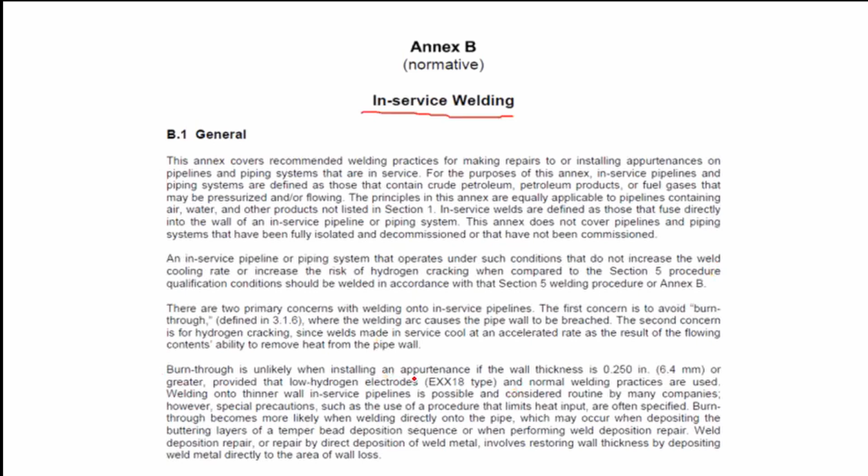As you can see here in this 4th paragraph, burn-through is unlikely when installing an appurtenance if the wall thickness of the pipe is 0.25 inch or greater. Based on Annex B, burn-through is unlikely to happen if the wall thickness of the pipe is greater than 0.25 inch and/or provided that the electrode used is a low hydrogen electrode type, the electrode types ending in 8, 5, and 6 digits.

So from the choices, you can rule out letter A, since stating the material only without information on the heat input and the pipe thickness cannot be a definitive answer. Letter C, pipes pressurized to at least 15 psi does not affect burn-through. Whatever the operating pressure of the pipe, it does not affect the welding discontinuity, that is burn-through.

Letter D, preheating prior to welding. Preheating actually softens the pipe material or reduces its hardness, so in some ways it can promote burn-through if preheating is not done properly. Letter E, welded by a qualified welder. Welding these pipes must be done by a qualified welder by passing the appropriate welder qualification tests, but it doesn't mean that burn-throughs will not happen in this situation.

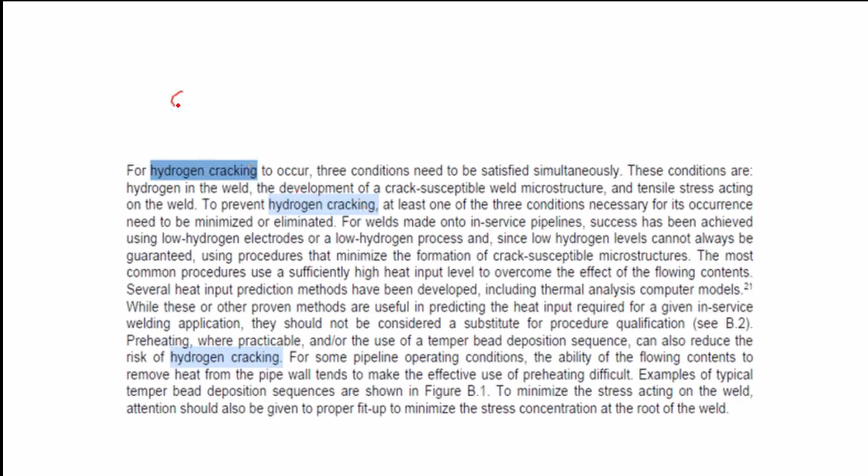So this question also refers to in-service welding. The answer can be found in Annex B, point 1, General, under the general clauses of API 1104 Annex B. In this paragraph, hydrogen cracking can occur when there is hydrogen in the weld, development of a crack-susceptible microstructure, and tensile stress acting on the weld.

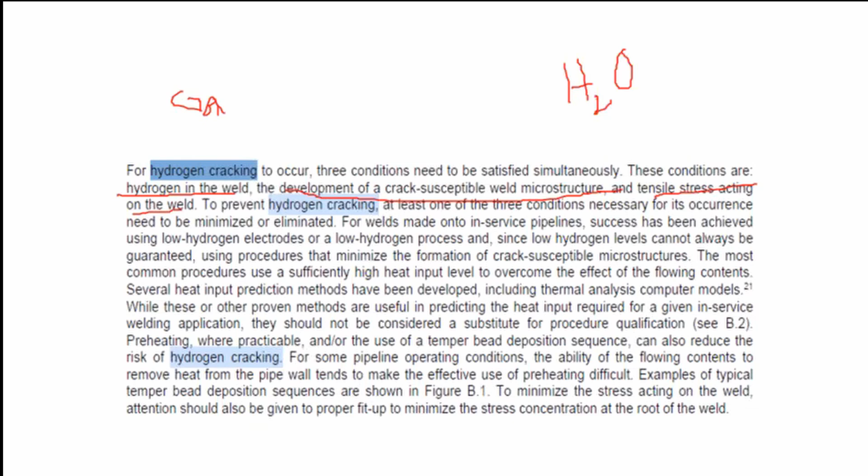The presence of hydrogen in the weld is possible because of moisture, since water is composed of 2 hydrogen atoms and 1 oxygen atom. Crack-susceptible microstructure refers to materials with coarse grain structure, more common in high hardness and non-heat treated materials, because they are more susceptible to hydrogen cracking, or cracking in general, if heat treatment methods are not properly implemented, and there is tensile stress acting on the weld.

So the last 2 points, crack susceptible microstructure and tensile stress, can be resolved with the use of heat treatment methods, because residual stresses can be relieved by PWHT or heat treatment. So that leaves us with the answer here.

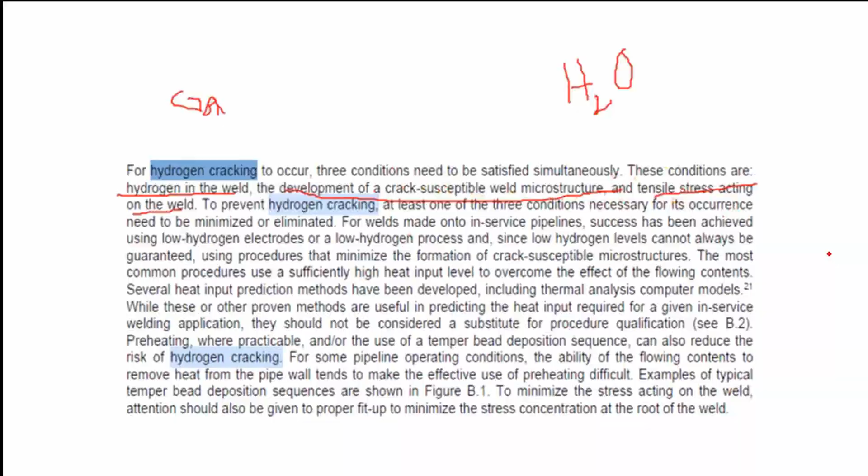Letter E, only A and C above. So a crack susceptible microstructure and tensile stress acting on the weld. The weld discontinuity may or may not induce hydrogen cracking. This is a very general statement; it will depend upon the discontinuity. The answer here is letter E.

For welder qualifications of an in-service longitudinal seam weld on pipe with a 12-inch or 300 mm outside diameter and a wall thickness of 1 inch or 25 mm, which test specimens are required? Letter A, 2 tensile, 2 nick break, 2 root bends, and 2 face bends. Letter B, 2 tensile, 2 nick break, and 4 side bends. Letter C, 4 nick break, 4 face bends, and 4 macros. Letter D, 1 tensile, 1 nick break, and 2 side bends. Letter E, 1 tensile, 1 nick break, 1 face bend, and 1 root bend.

There are separate guidelines for qualifying welders for in-service welding, referred to in section B.3 of Annex B. Testing of welded joints: similar to other welding qualifications, there are requirements for the number of test specimens for in-service welding given in table B.5. Looking at this table, you can see the total number of test specimens depending on the sleeve wall thickness of the pipe.

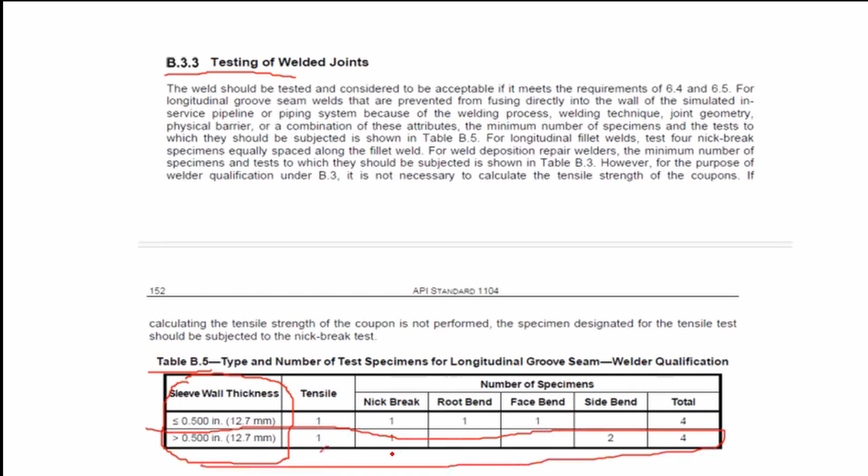So looking at this table, the wall thickness is 1 inch, so this row should be the answer: 1 tensile, 1 nick break, and 2 side bends, a total of 4 tests. Looking at the table and based on the choices, the answer here is letter D, 1 tensile, 1 nick break, and 2 side bends.

For in-service welds, the carbon equivalent of the material to which the procedure applies should be identified. Which of the following elements is not used to determine the carbon equivalency? Carbon is important for in-service welds because it determines the hardness of the material. Different materials have different carbon equivalents depending on their chemical composition, which you can find in the mill certificates. Letter A, copper. Letter B, nickel. Letter C, silicon. Letter D, vanadium. Letter E, chromium. This can be answered if you are familiar with the carbon equivalent formula, which you must know if you are taking the CWI exam.

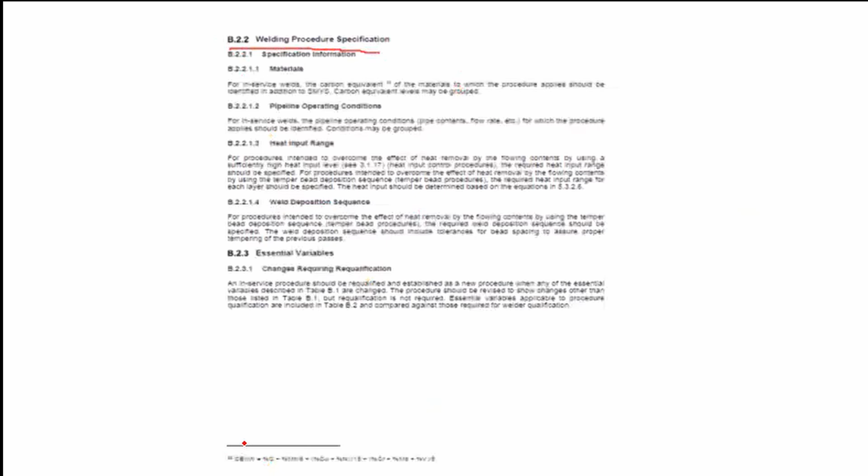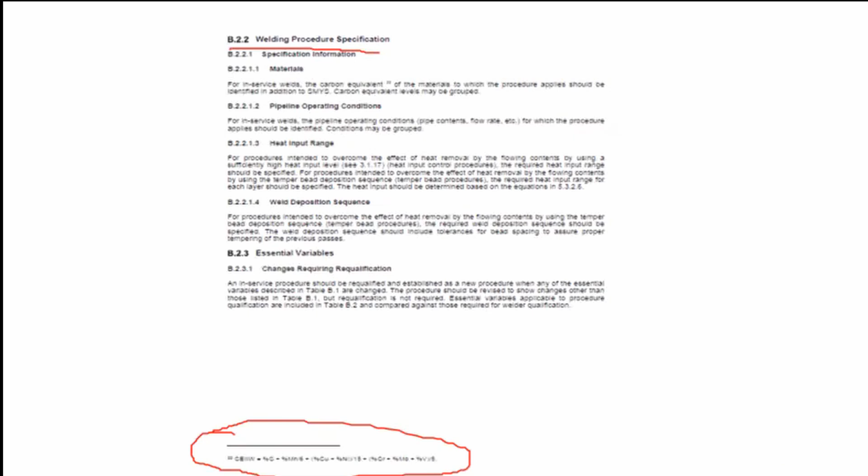If you want to make sure, you can refer to the footnote of B.2.2 Welding Procedure Specification under the annex on in-service welding. It's a bit small here, but this is the formula for the carbon equivalent, where the elements considered are indicated. Based on this formula, silicon is not included, so the answer is letter C, silicon. Silicon has a different function, I think for deoxidizing the steel, and does not contribute to the carbon equivalent or, in general, to the hardness of the material.

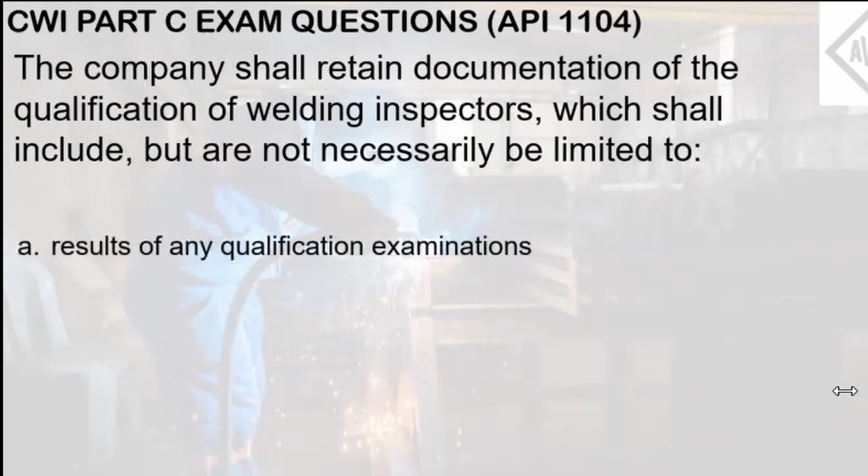The company shall retain documentation of the qualification of welding inspectors, which shall include, but not necessarily be limited to: A, results of any qualification examination; B, education and experience; C, training; D, all of the above; E, none of the above.

The qualification of inspection personnel can be found in 8.3 of API 1104. Documentation is necessary not only for safekeeping and legal purposes, but also to track if qualified welders need to be retested. I think there is an expiration, so to speak, of the qualification if they are not using a specific welding process, for example GTAW or FCAW, for a couple of months or years. They need to be retested, for example if they have produced unsatisfactory welds, or to have proper tracking of these welders.

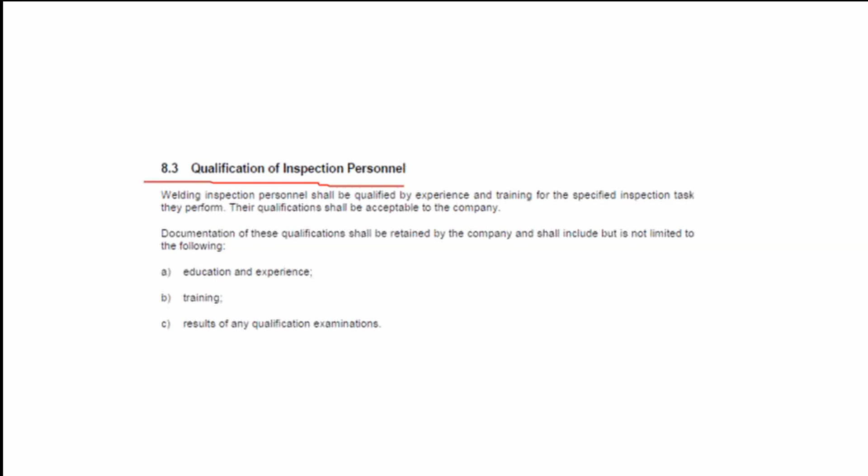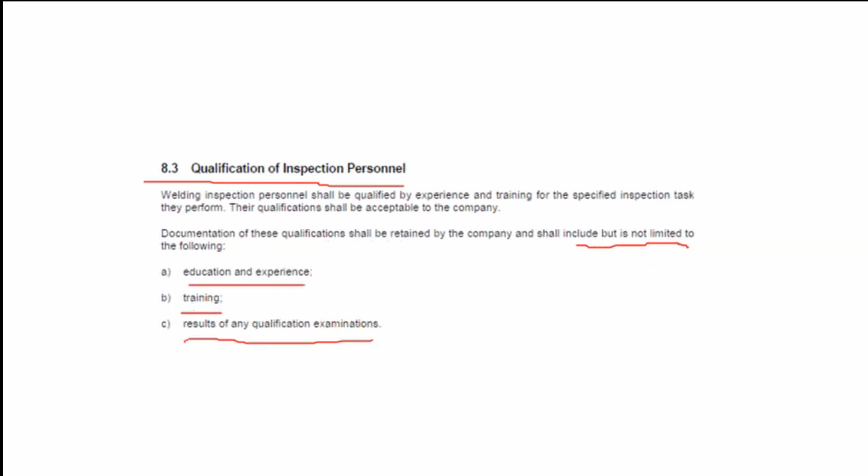As you can see here, the documentation of this qualification shall be retained by the company, and the information included should be education and experience, training, and most importantly the results of any qualification examination. So by that clause, the answer is letter D, all of the above. All of these results must be retained in accordance with company policy and API 1104.

There you have it. That's 5 practice questions that will help you during the CWI Part C examination for API 1104.